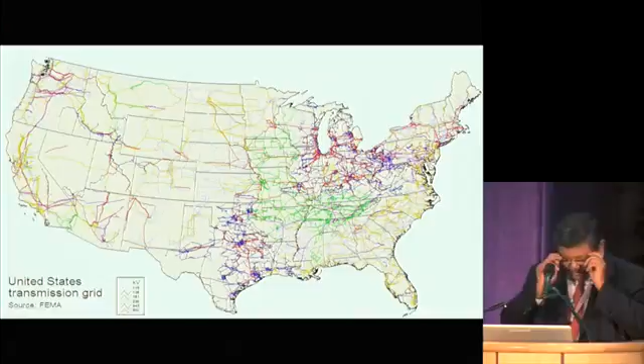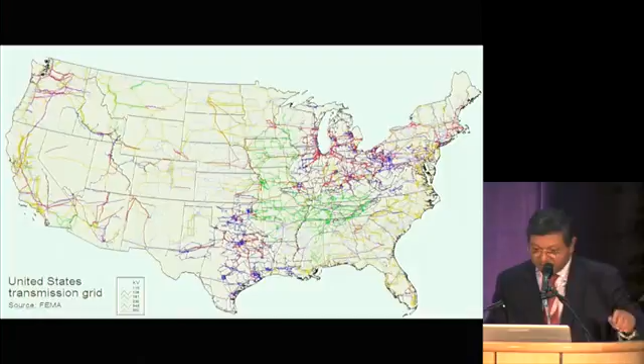It's fundamental. But the electricity grid that we know today, of course, dates back to the times of Tesla and Edison, as Emery pointed out. And the architecture for the grid and how it is structured has not fundamentally changed. The devices have changed, but the architecture is about the same. So this is the Tesla-Edison grid paradigm, as was mentioned earlier. You have centralized generation. Why centralized? Because it was cheaper in thermal power plants.

You got long-distance, high-voltage transmission. And then you have medium voltage distribution in your neighborhoods. You have 13 kilovolts in your neighborhoods. And then you have 120 volts, 60 hertz in your homes. In this case, the generation always tracked the load. So if you turn on a light, somehow the generation understands that you have turned on the light, the load has gone up, and it'll ramp up the generation.

How did they actually communicate with each other? This is in the times of Tesla and Edison. How did they know? When you turned on the load, the frequency went down a little bit. And when the frequency went down, you ramped up the generation to bring back the frequency to 60 hertz. And the standard in the United States is 60 hertz plus minus 0.035 hertz. That's how accurate it is. So that was the means of communicating at that time. The world has changed a little bit since then.

So before we go into some of the changes that we are seeing, let me explain how the grid works a little bit more. Because based on this paradigm that I've just explained, the institutional structure, the regulatory framework, the business models also follow this paradigm. And so when that is questioned by some of the modern things that are happening, one has to look at it holistically. You can't just look at technology. You got to look at technology in the context of markets, in the context of institutions, in the context of the regulatory frameworks, which I'll come to.

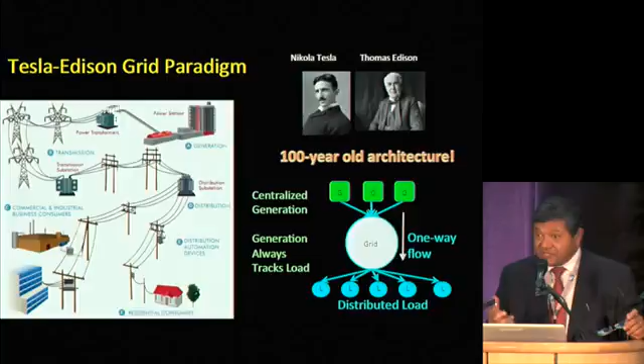So this is how it works today. And very simple, I'll do a grid 101. Of course, there are much more details to it. Today, the grid, I'll just take the example of California. There's a wholesale market which is run by the California Independent System Operator, CalISO, which is based in Folsom, which is just east of Sacramento. And they trade in wholesale electricity. There are buyers and sellers. Utilities buy, utilities sell. Some of them are large wind generators or utility-scale solar plants.

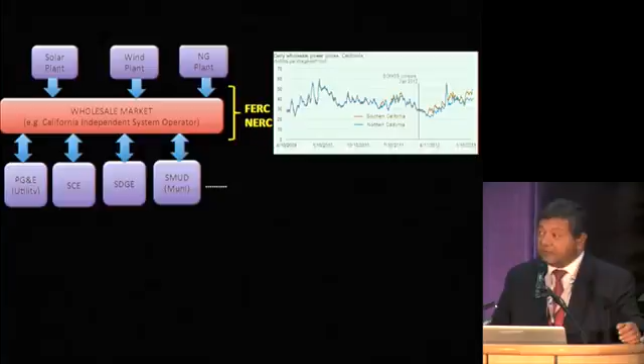And that is governed, because sometimes it crosses over state lines, by the Federal Energy Regulatory Commission, FERC, which follows the NERC rules, which is the technical arm of FERC. And it is a market, so there are prices that change, fluctuate. Not quite like a stock market. It is not real time, as I'll explain, but the prices are fluctuating at the wholesale level. And it is locational.

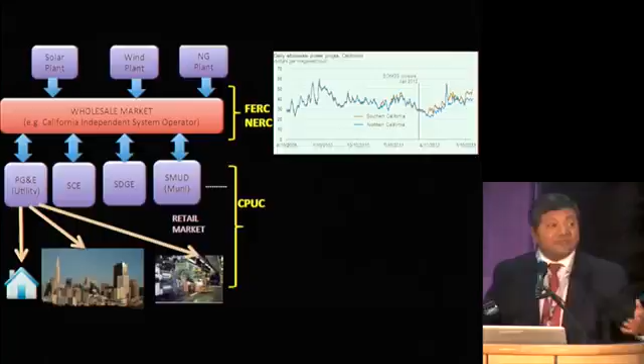Some places have lower prices than others because of congestion in the transmission network, et cetera. Then there's a retail side. For example, locally, we are served by PG&E mostly. There are some other co-ops or munis around. The retail side is local, and it has to follow the California Public Utility Commission. These are regulated utilities, and today those rates of electricity are determined by the Utility Commission.

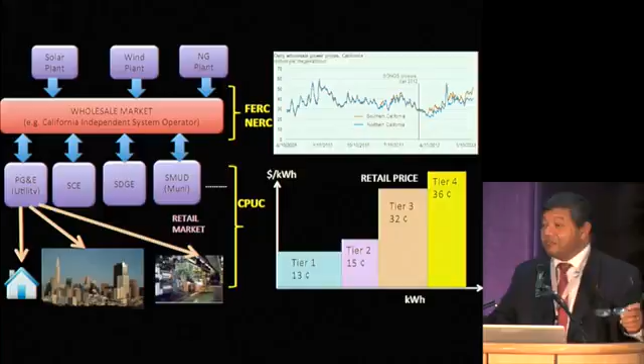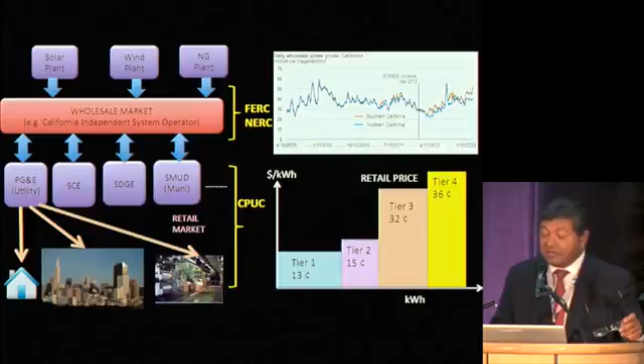For example, we have a very common tiered structure of rates that I and you and all of us pay out here. This rate structure is now being changed in California to more of a time-of-use rate, but that's the rate structure we had for many years. What you really hope for is that the wholesale price is actually lower than the retail price, because if that does not happen, the utilities will be buying high and selling low, which in fact did happen for a little while in California.

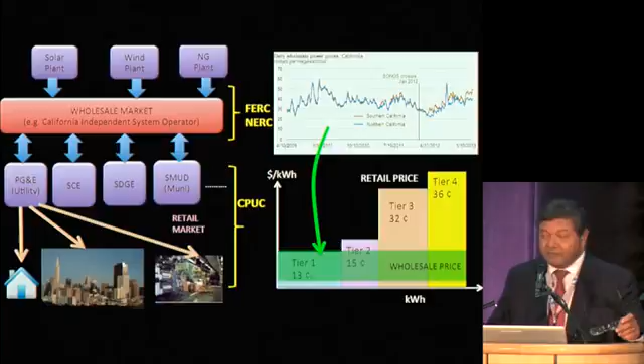But the rate structures and the wholesale price are determined in such a way that this is sort of hoped for. So that's where we are. This is how it operates. Frankly, if you go to the California ISO, which I hope some of you get a chance to do, you'll see this big control room where the frequencies are monitored, and you're really looking at the whole of California buying and selling. But there are many timescales involved in the grid, and I'll just explain a little bit what those timescales are.

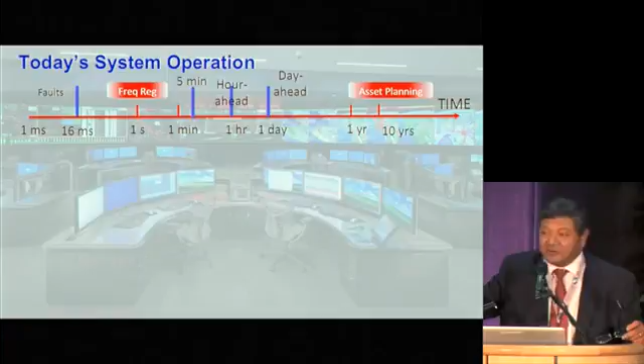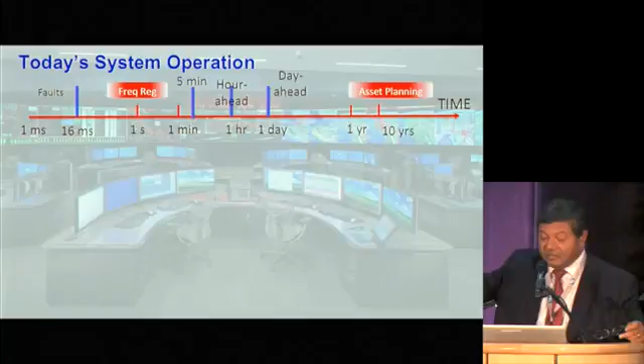16 milliseconds is 60 hertz, basically. That's on the shorter timescale, and some things happen even shorter than that, like faults in the grid. The really long timescale is asset planning, which happens over decades, and billions of dollars are at stake because there are new efficiency mandates or new kinds of power plants that people may be planning, or transmission lines, et cetera. Those are long-term planning. In between, there are various markets and things that the grid does.

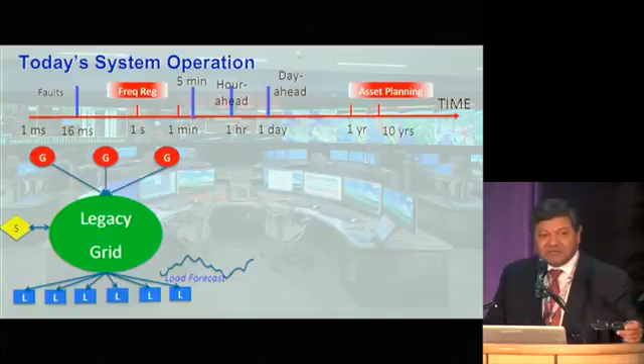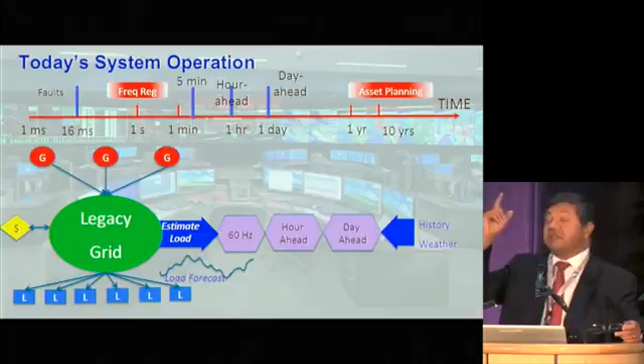So how does the grid operate? Well, you have the legacy grid, and the first thing the grid does is forecast the load. Load forecasting happens based on weather and some history, and that's mostly the day ahead. So today's electricity was planned yesterday, most of it. Based on that, the dispatch planning happens, and 90% of the dispatch is from yesterday. That's the planning that happens.

A little bit happens an hour ahead, because the day ahead doesn't get the forecast exactly right, so there's a little bit of a gap. So you have a big knob, then a small knob called the hour ahead, and finally frequency regulation, which is on a second basis. That's how it works. Now, it's very hard to take wind, which fluctuates on an hourly basis, and integrate it onto this. This is the issue.

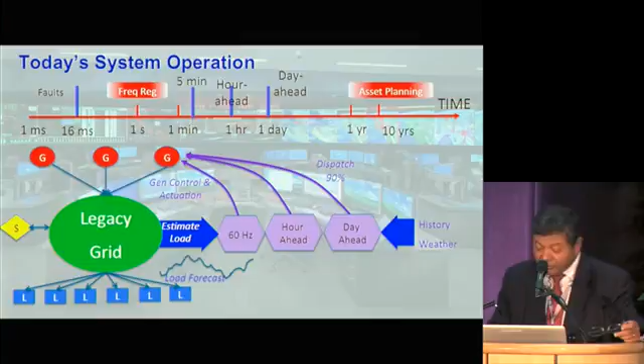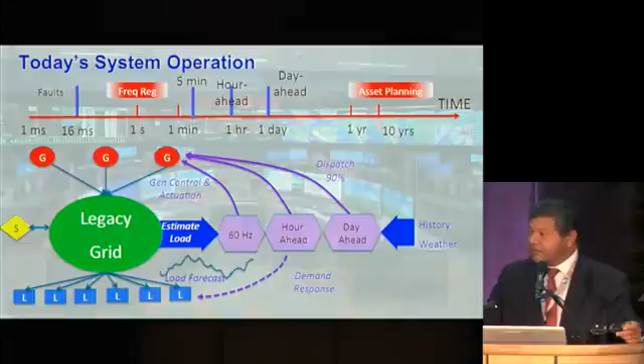More recently, you have demand response: the peaks were going up, and they said, let's shave off the peaks by controlling the demand, because buildings, for example, have some thermal mass. So you can turn off the air conditioners a little bit and thereby shave the peaks, because that's a very cost-effective way of managing total system-level cost. In fact, for those who are grid geeks, look at how California ISO works on a daily basis.

Given what we have today and what Sally talked about early on, here are the big challenges. This is not just California. I use California as an iconic example, but this is a global challenge. The big global challenge we are talking about today for the electricity grid in particular is how can we help decarbonize our electricity system and reduce cost? And there are various measures.

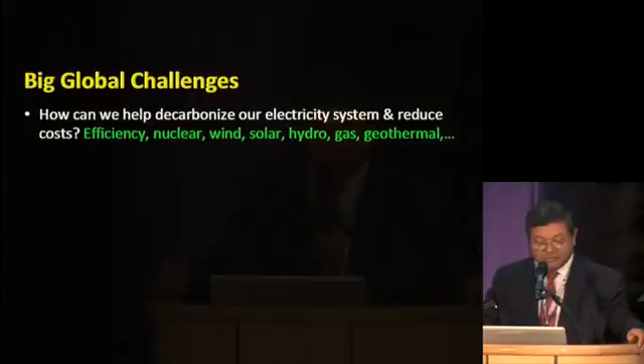How do you decarbonize? Well, you can increase efficiency, as Emery talked about. You can use nuclear, wind, solar, hydro, gas, geothermal. All of these are options. Now, how you choose and what you choose has billions of dollars of implications. Each of these has a different time scale. Nuclear is a longer time scale than, for example, solar. And so the planning for this becomes very, very important.

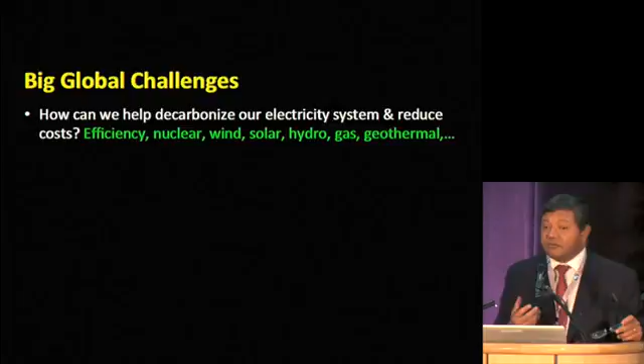But there's no doubt that the world is going to decarbonize and get more efficient. The question is, how can we really help that happen? The second one is, how can we help make our electricity system more resilient and secure?

And this is under various threats, whether it's cybersecurity threats, as well as natural threats that happen because of storms, et cetera, that we have seen happen in the United States and, frankly, in the rest of the world as well. And finally, the other issue about electricity, which I think in the 21st century really ought to be a human right, because if you don't have electricity, you really don't get out of the stratum of society to really develop and have economic growth surrounding you.

And that is, how do we offer solutions for access to affordable electricity? Because there are 1.5 billion people who do not have access to electricity. There's another billion or so who have very marginal access. And how do they leapfrog into the 21st century and not have to rely on the wires coming there? Those are the big, big challenges that the world is facing. And we want to be right in the middle of that.

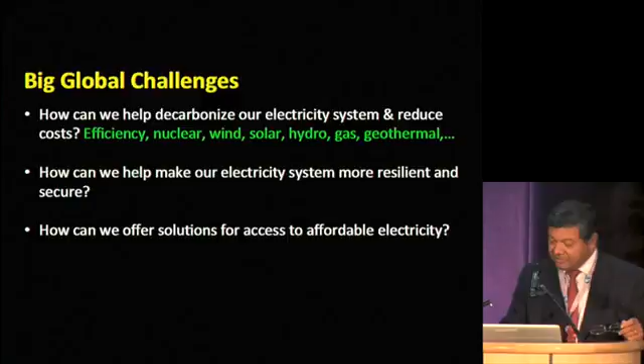So in terms of California, coming back to that, California just passed Senate Bill 350, of getting to 50% renewable electricity by 2030. And this was 33% by 2020, 50% by 2030. Now, if you think about it, is it possible? Well, it is possible, but it's going to be hard. Because the grid, as we know it, was never designed for 50% renewable. And so the question is, how do we get there? So just to give you an idea of what's the lowest cost way.

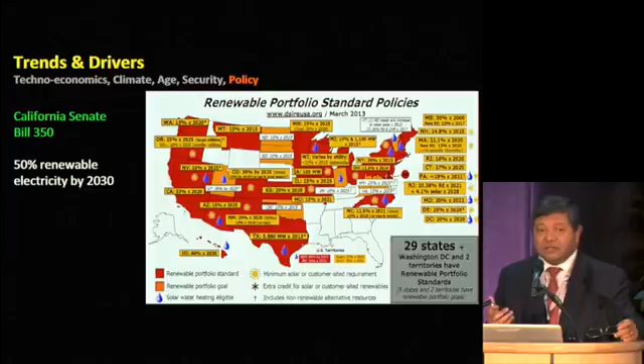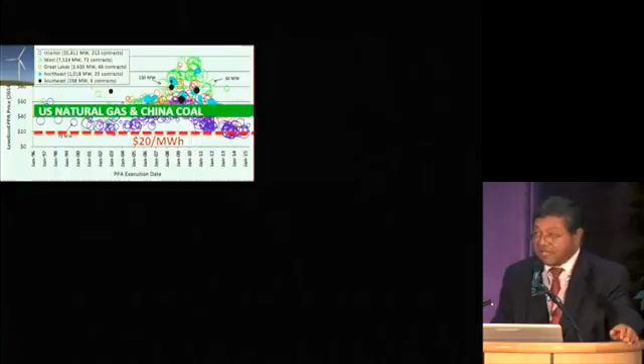Well, for example, if you're looking at wind electricity and solar electricity, here are some numbers. This is data in power purchase agreements, PPAs, on price of electricity sold by wind. This is actual data from business contracts. And you can see right away that the price is coming down, and it is close to $20 a megawatt hour in some parts of the country. And this is using a $23 a megawatt hour production tax credit. And so if you take that $23 away, it's about $43 a megawatt hour, still pretty cheap. And where is today U.S. natural gas and China coal? It's there. U.S. coal and nuclear is over there today.

Now, because of that, you have the higher penetrations. Now it's sort of going up exponentially. A lot of wind capacity is being added. There's more added in China. But here you have about 65, 70 gigawatts of wind capacity, which is about 5 to 6%. At 5 to 6%, today's grid is fine. At 50%, it's a different ballgame that we're talking about.

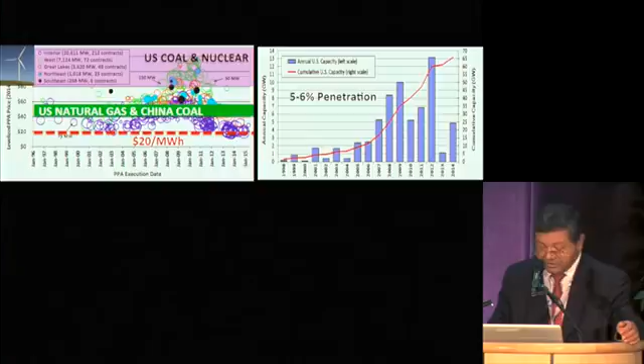Solar is a similar story. The costs are coming down. These are actual business contract prices with the 30% investment tax credit, which will go down to 10% investment tax credit in 2017. But nevertheless, you can see the trends that are going, and you can see the PV penetration going up. People talk about batteries. Here are the actual prices of batteries. And right at the bottom is where Tesla and Nissan are. And they're at about $350 a kilowatt hour. But the trends are there. They're coming down.

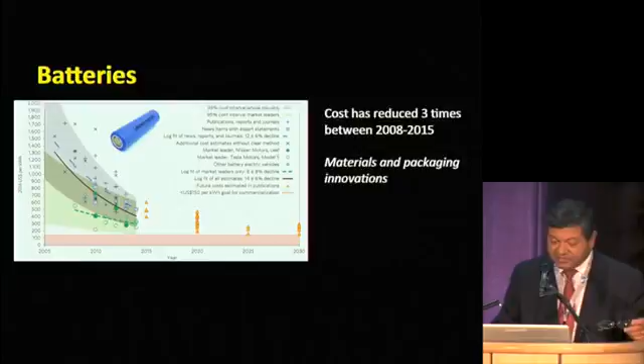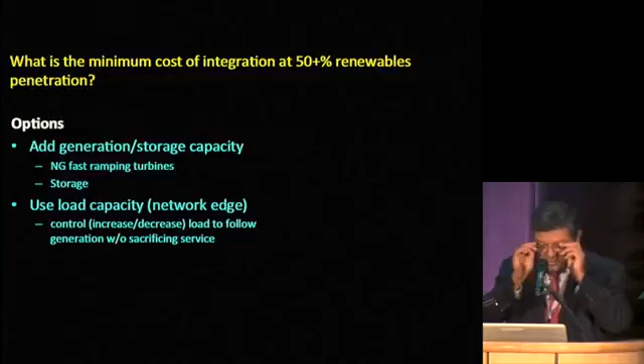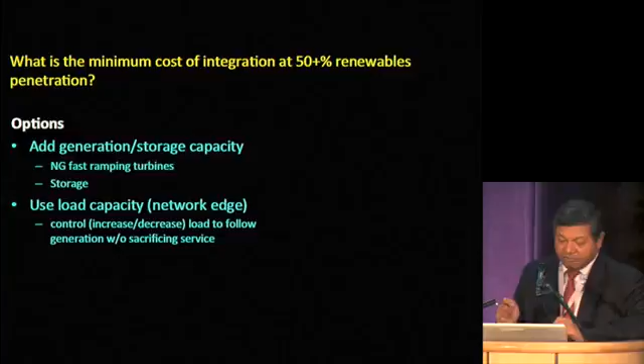So if you think about the electricity grid now, these are good trends. If you think about the electricity system in Tesla's and Edison's time, they did not have low-cost wind at scale. They certainly did not have solar photovoltaics, lithium-ion batteries, LED lighting, power electronics, computers, network distributed computing, the internet. They didn't have this. And by the way, they're getting cheaper and better. So if you think about the grid in the future, and you ask the question, what is the minimum cost of integration? Even if solar and wind were free, the cost of integration is non-zero. And that cost of integration at 50% renewable is non-trivial. And so these are the options.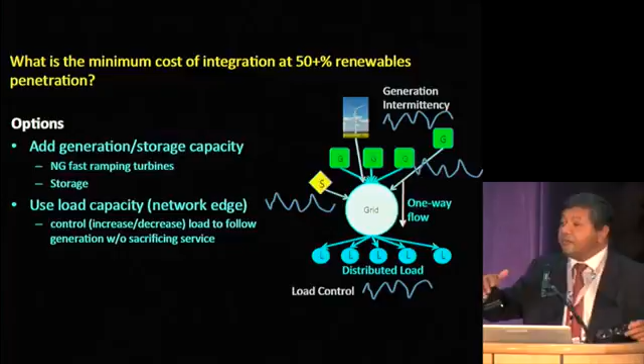For example, if you have a traditional grid, and if you were to add 50% of wind, well, we know it is intermittent. It has to be balanced. How do we do that? Well, one option is maybe add generation capacity. Well, that costs money. If natural gas turbines can ramp up and down and keep up with the wind, that's one option, but that'll cost money. The other option is to put a lot of storage. How much is necessary? Well, that's also going to cost money. And finally, you could control the load a little bit up and down, and thereby manage a little bit of the fluctuation of the generation. Well, that costs money too.

The question is, what is the lowest cost option? What is the lowest minimum cost of integration of intermittent generation, which the grid was never planned for? And we really, frankly, don't know the answer to that. What is the minimum cost?

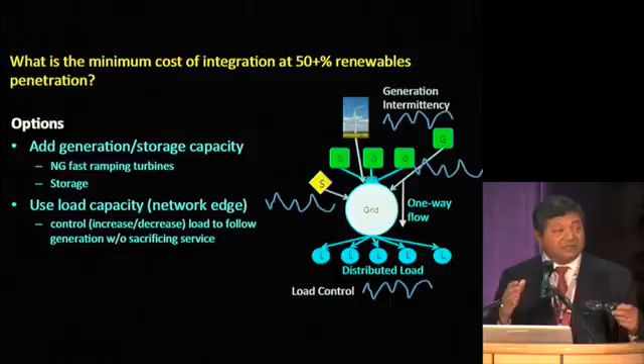So at Stanford, we are looking at that very important problem and seeing how do we address that. What's the framework for asking that? And what are the options that we can provide? We're not running the grid, but what we could do at Stanford is provide technology, provide knowledge, provide people. So this is what we are thinking about.

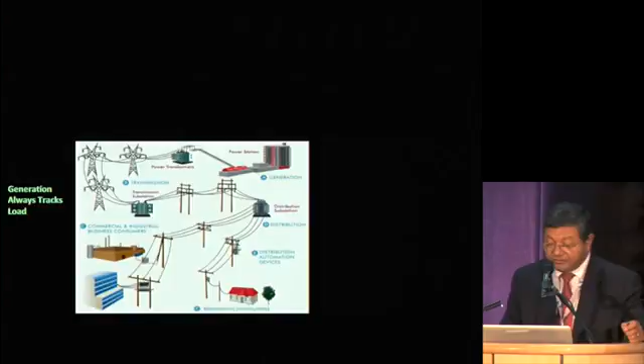This is today's grid, and as we know, generation always tracks the load. Now you're injecting intermittent wind and some solar into it. How do we manage it? Well, maybe, can the load track the generation? And to do that, of course, you need some intelligence. You need a local brain. Those brains are cheap right now. And you can have a lot of distributed brains.

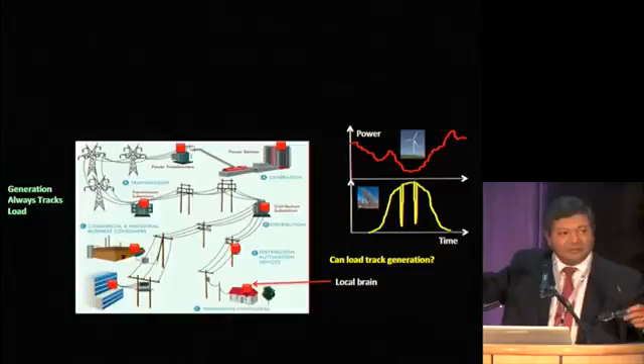You can call it the Internet of Things. These are the things that I'm talking about, the grid-related things. But these are independent, and somewhere you need some coordination. And this is where some really cheap computing comes in, which is called the cloud today. And if you do that, you can perhaps do automatic generation control, which is done today, but connect it with what is going on at the edge of the grid, which is where the distributed resources are, and somehow coordinate and thereby minimize the cost.

Now, of course, this is the technical realm that I'm talking about. This technology will only go somewhere when there are markets associated with it, when the institutions and the regulatory framework are there, where the business models are created to enable this to happen, and frankly, there are consumers involved because they are at the edge of the grid. So this is not just a technical problem.

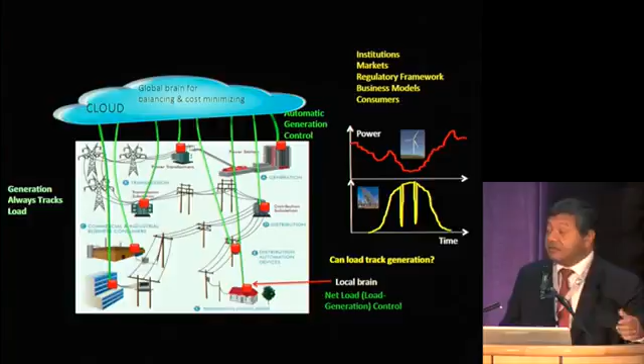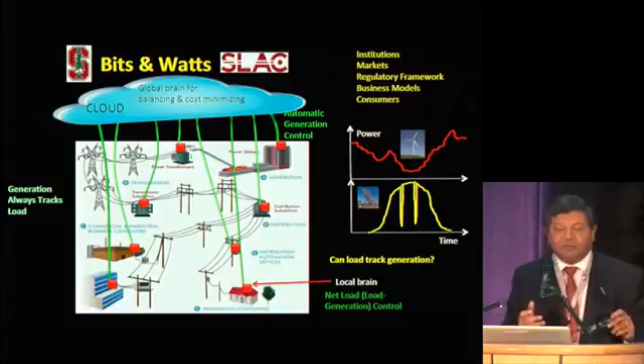We have to think of it holistically, and that is the initiative that we are starting to create at Stanford, and what we are calling it, for lack of a better term, bits and watts. Watts have always enabled the bits. It's time that the bits enable the watts now. And that is what we are trying to create. Let me give you a few examples of some projects that we're thinking of. Let's start with the edge of the grid, and we'll go towards the transmission system.

Edge of the grid is where the loads are today. We have homes, we have buildings, we have factories, and that's where the loads are, and so far, in the last 120 years, it has only been the loads. Well, we're going to see some changes, as was pointed out, because the costs are coming down. So you have the wholesale ISO market, then you have the electric utility, and then you have the edge of the grid where the loads are. Well, maybe you want a little router in there, just like we have an internet router. But this is for the power.

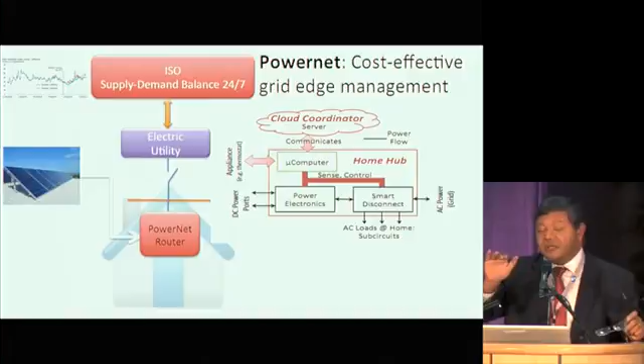And this will be a combination of network connectivity plus some power electronics to be able to turn on and off or modulate the power that is going in, so that you can actually control the net load. And why the net load? Because you may have generation, you may have storage, you may have other kinds of loads that you may be able to turn off. Nest is a great example, but it is essentially a beautiful looking switch. That's what it is. And it is networked. And you may have other options in the future as well.

And these have to be networked, which most homes and most buildings are, and thereby be cloud connected. But one of the issues of the cloud is that there's some latency involved. Sometimes packets drop off, and there are delays that happen. So you can't rely entirely on the cloud. That would be a mistake. You still want the grid to be stable. And so you need some autonomous local intelligence to be able to do that.

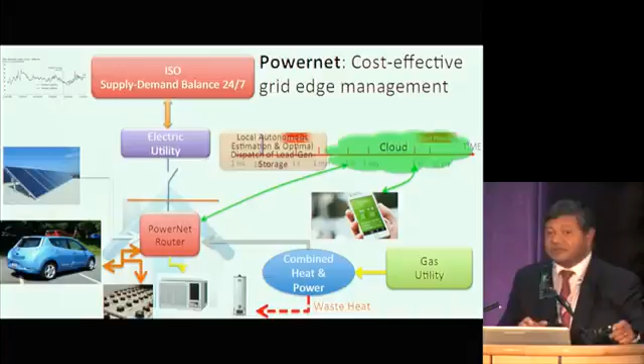So this is a project that we have started called PowerNet, which is really looking at the edge. And of course consumers have to be involved. But now imagine it's not just one building, but a few buildings. Could you use that to provide services for the grid?

So different homes and different buildings may have different kinds of loads. They may have storage, they may have generation, and you have the power router. And they have to be low cost. And the cost of this power router may have to comply with the market signals that are there, price signals.

But you can then look at the cloud connectivity of an ensemble of this and thereby control the power, essentially in a cloud-based aggregation of these loads, and provide services for demand management as well as grid services for balancing the generation intermittency, et cetera. And so this is what is being done as we're just launching these projects right now. It's not that this is only in the future.

There is some very nice work that has already been done at Stanford. These are some of the colleagues in electrical engineering, civil engineering, Ram Rajagopal, and many others. And this is a program called VISDOM. And here's the issue. If you look at the load profiles of the edge of the grid, where there's homes,

people have been assuming the load profile looks like this, that you have a peak in the morning when people get up, then people go to work, the load comes down, and then it goes back up again when people come back home and start turning on the lights and start cooking and watching TV. And this is the load profile, and it's been the assumption.

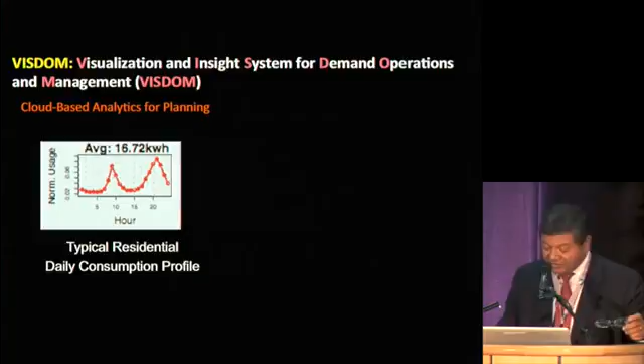Well, what they did was they looked at the meters of 500,000 homes in this local area, and what they found is that many of the homes don't follow this way. In fact, they follow 200 different patterns. And what they found was some homes, the load is up at night and goes down in the middle of the day. Probably some grad students living in them. And so you suddenly find with data that this is not exactly what people thought it would be.

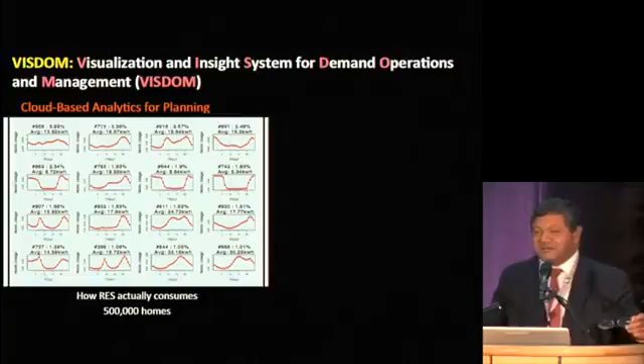And the question is, can you predict the load of individual homes? It's very hard for individuals to know when people will turn on the lights and turn on the washing machine. But if you aggregate them, the error bar goes down. The question is how much aggregation. And what they found was that if you just take a little bit of aggregation in a building, for example, or a feeder line, the error goes down to less than 10%. And so you really don't have to aggregate the whole city, and you can still predict the load.

And once you have the load profile, then you can start planning as to which edge-of-the-grid homes and buildings are good for peak shaving, which ones are good for load shifting, and which ones are good for energy efficiency overall. And now you can customize the demand-side management, which really has not been done in the past. So this is something that we are embarking upon.

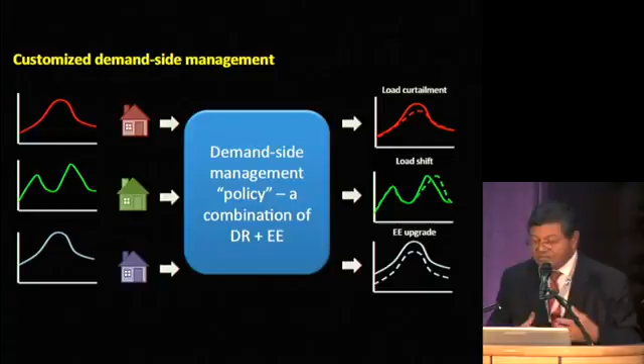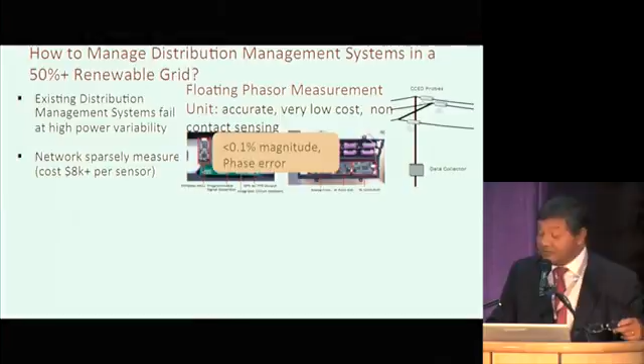If you are going to inject a lot of solar electricity or distributed generation onto the grid, you may have issues with how much backfeeding of electricity; the voltages may go up or down, and you need to measure and thereby be able to control. And so these are some simple devices that will latch on to your feeder lines and be able to measure and then be connected and thereby provide the information to really manage the grid on the distribution level. This is a little bit of aggregation.

And finally, there are GridSpice-level models where all the distribution things can go into a GridSpice going to the transmission level and thereby give you plans. Planning is supremely important for utilities and the ecosystem, because that's where billions of dollars are planned and deployed. So these are very, very important issues, and I'm just giving you snippets of what things are going on today, but this is just the start.

The research program that we are planning is an integrated one. This cannot be just an engineering issue. This is a holistic thing.

And so you go all the way from appliances, smart appliances, et cetera, to power electronics, to controls, to optimization, all the way to market structures so that they are commercially viable, and frankly, with some security in mind, because the grid today is not very secure.

This is not just a research program, this is an education program, again, offering holistic education to our students and our partners, not just in power systems, but market structures, technology trends, et cetera. And this is not just for our students, but for our partners, as well as people in the industry and the government, so that they get the holistic view of what the electricity system is all about, and they can connect the dots and figure out which levers to push where to get to the decarbonization, the efficient grid.

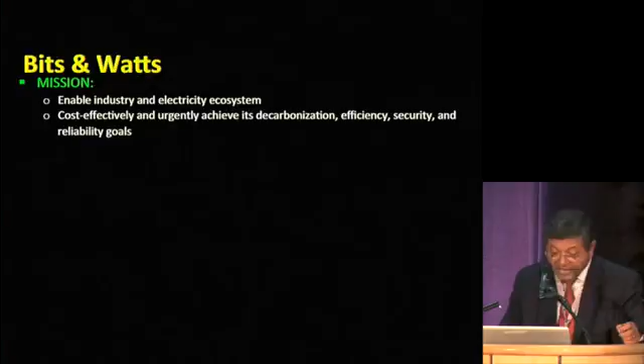And so just to summarize it, our mission is really to enable the industry and the electricity ecosystem. We don't run the grid, but we could enable it to really cost-effectively and urgently achieve its decarbonization, efficiency, security, and reliability goals. The mechanism we have is to use research, education, and translation into practice. That's what we do. We're going to open source all our hardware designs and software solutions so that we enable people. And at the end of the day, we offer people. We educate people.

Our success, we spent a lot of time defining what should be the success of Bits and Watts. And our success is really if the industry adopts and implements the solutions in practice. That's what we want to see. To provide the holistic education for our students and our industry and government partners and impact policy. It's very important. And finally, this is not the launch, we hope to launch with some real demos in early 2016. So stay tuned.

So let me just stop here, and thank you very much. Happy to answer some questions. Okay. Amory.